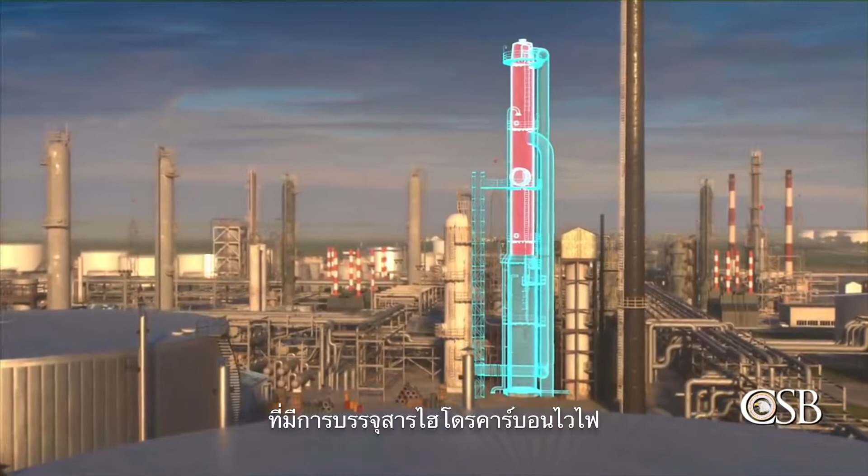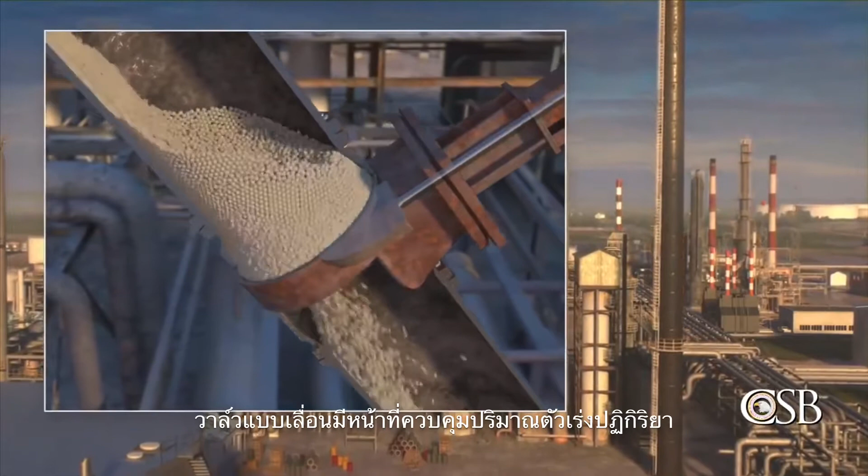Slide valves control the flow of catalyst between a reactor, which contains flammable hydrocarbons, and a regenerator, which contains air. It is important to prevent mixing the hydrocarbons and air, since if they mix, a dangerous explosion can occur. To avoid this hazard, the slide valves maintain a catalyst level between the reactor and regenerator, which acts as a barrier.

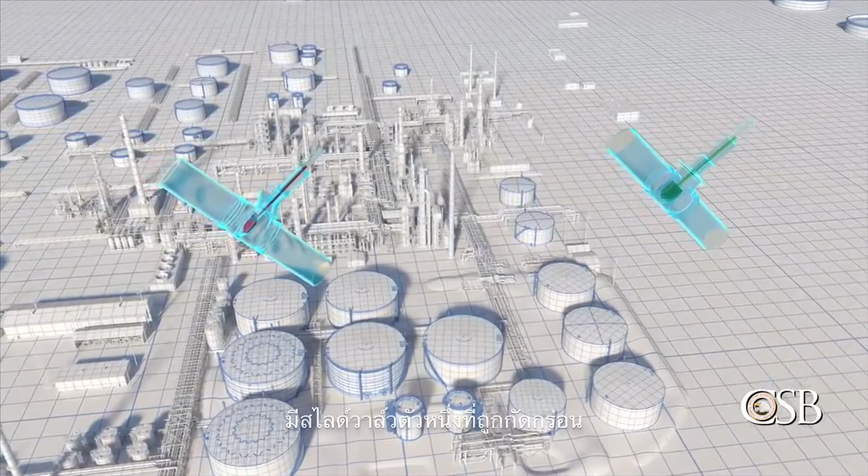To initiate the shutdown of the FCC unit, refinery workers stopped the flow of hydrocarbons to the unit and closed the two slide valves connecting the reactor to the regenerator. But unknown to the workers, one of those slide valves was eroded, and even though it closed, it could not maintain a catalyst barrier in the reactor.

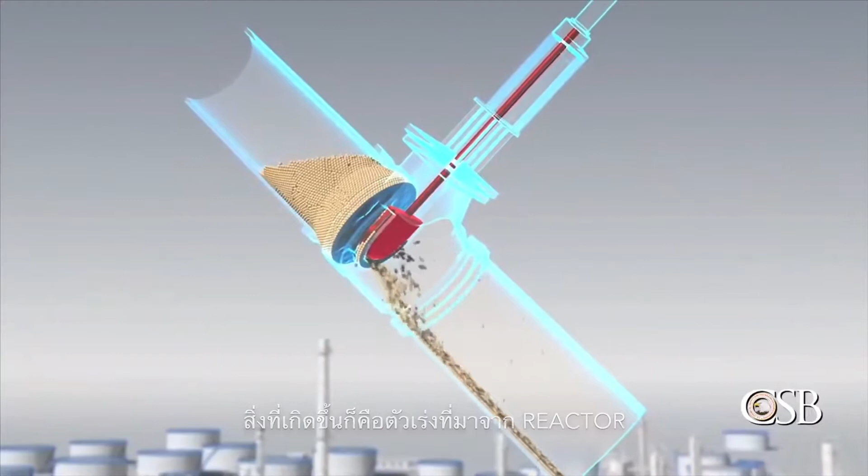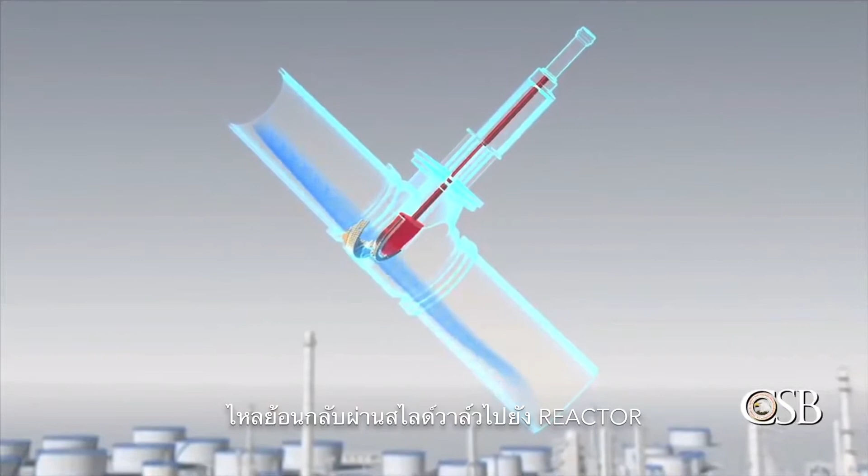As a result, the catalyst from the reactor fell through the valve to the regenerator, leaving no protective barrier between the two pieces of equipment. This allowed air from the regenerator to flow backwards through the slide valve into the reactor, and then into equipment downstream of the reactor, which contained hydrocarbons, forming a flammable mixture.

At approximately 10 a.m., the hazardous mixture of air and hydrocarbons found an ignition source, and there was a large explosion.

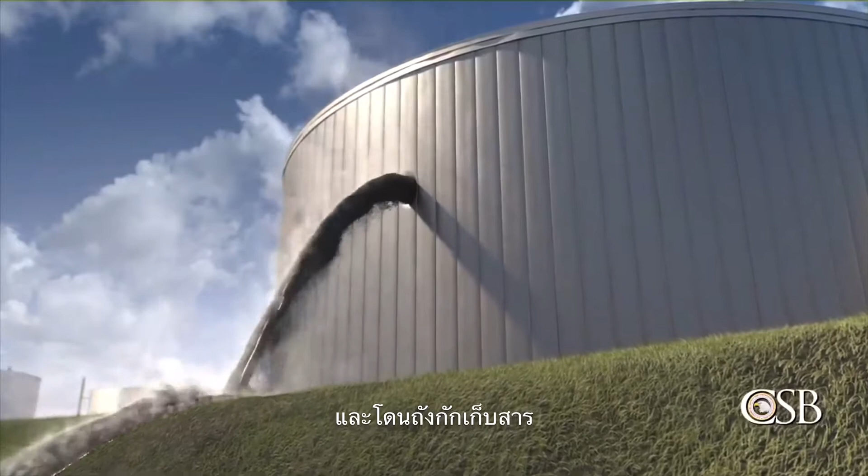Debris from the explosion flew about 200 feet and hit a large above-ground storage tank, puncturing the side of the tank and releasing hot asphalt. Asphalt poured out of the tank over the containment berm and into the refinery's operating units, where it spread along the ground.

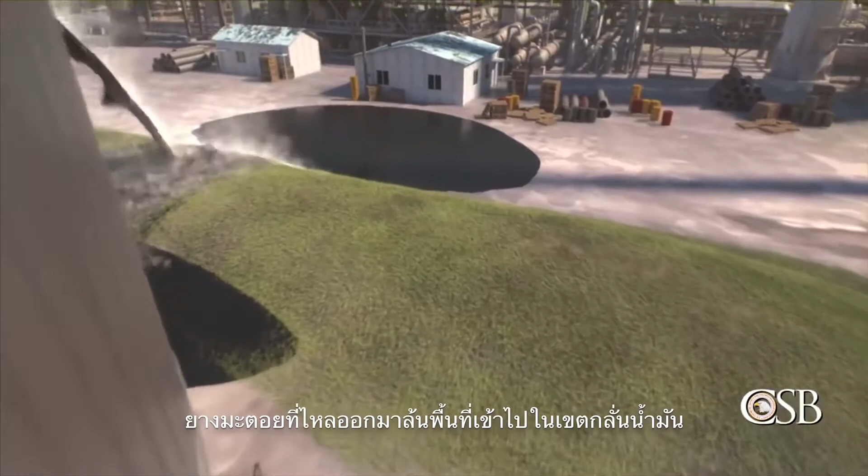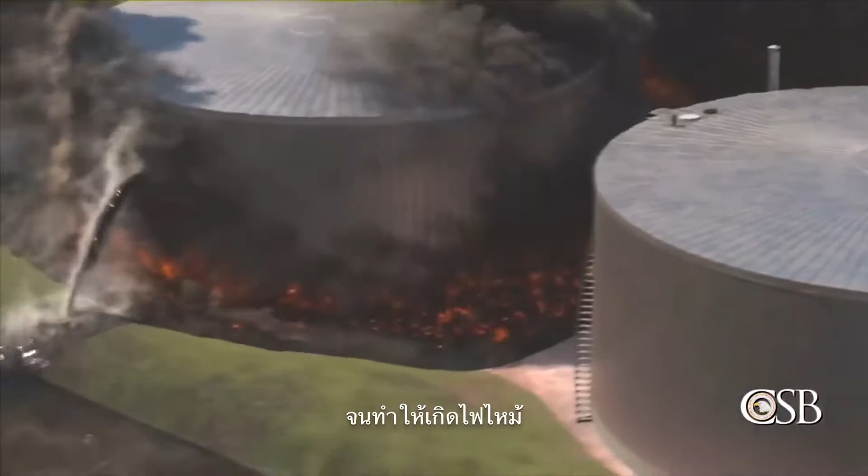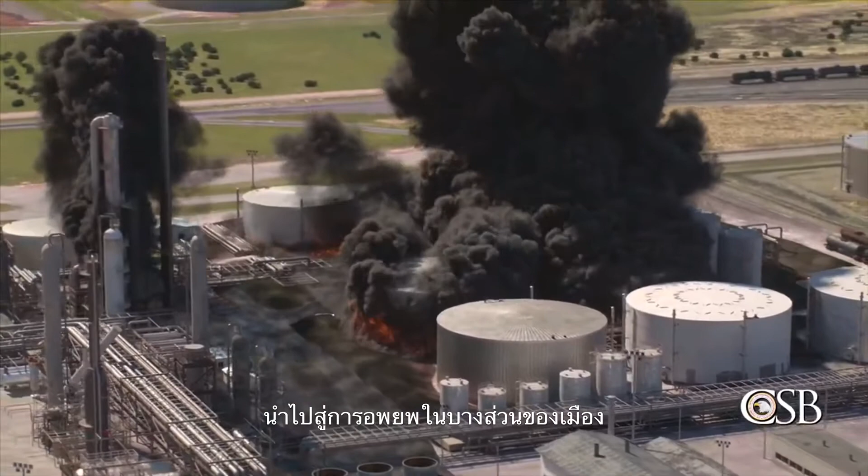At around 12:15 p.m., the released asphalt ignited near the storage tanks, and a fire broke out. The fire traveled along a stream of asphalt to the refinery's crude and FCC units. The fire produced a huge plume of black smoke, leading to the evacuation of a portion of the town of Superior. Typically, this type of asphalt fire can burn for days.

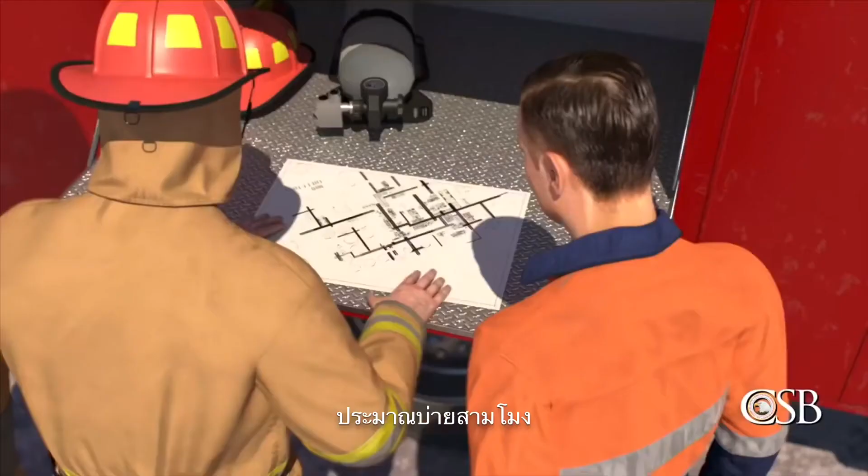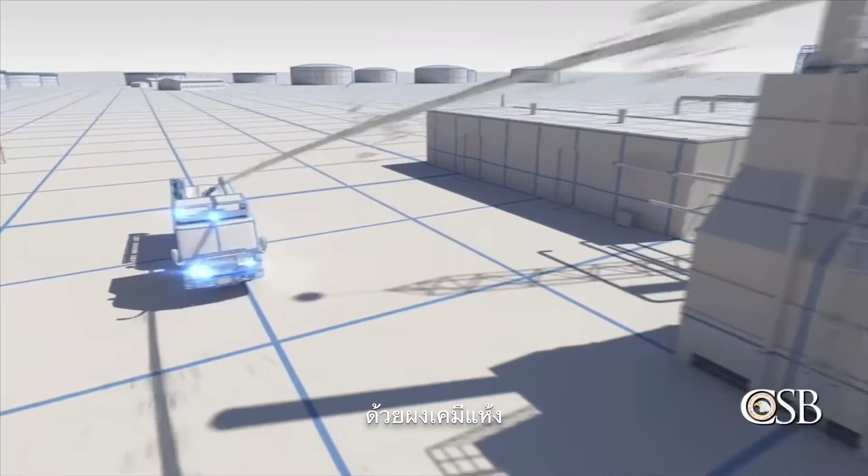A plan to extinguish the fire was developed by the refinery's emergency response team. Around 3 o'clock, they began to address the asphalt fire together with the Superior Fire Department. A fire truck drove to the edge of the crude unit, and emergency responders sprayed dry chemical fire extinguisher inside to fight the fires that had broken out there.

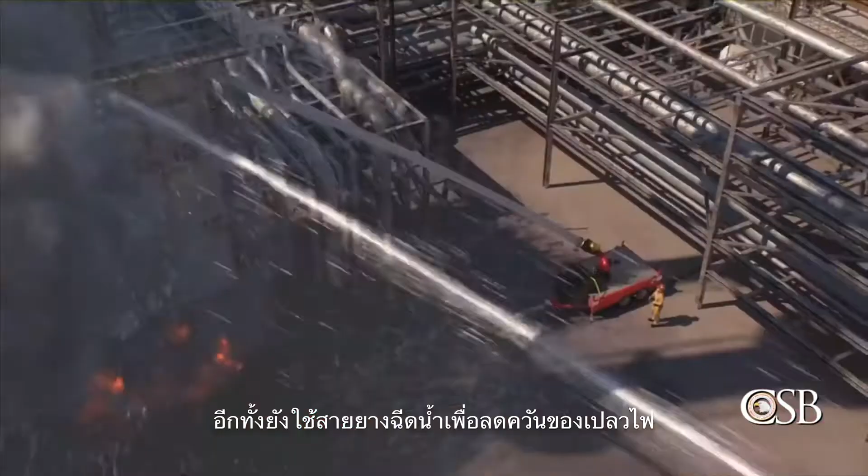Responders also used two stationary hoses called monitors to shoot water into the crude unit in an attempt to extinguish the flames. While these fires were being put out, over by the storage tanks, emergency responders began to approach the large area of burning asphalt.

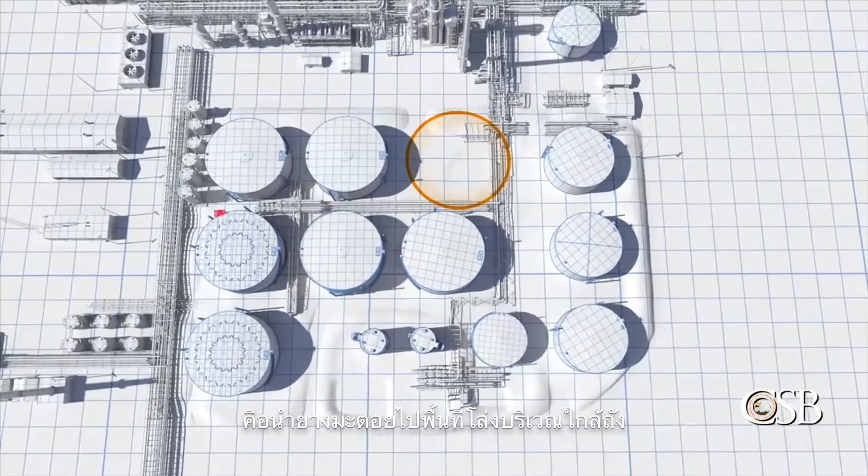The emergency responders' plan was to push the asphalt fire into an empty area near the storage tanks, and then aggressively attack the fire from multiple directions. First, they used two monitors, one to the north and another to the west, to sweep water to push the asphalt fire toward the designated containment area.

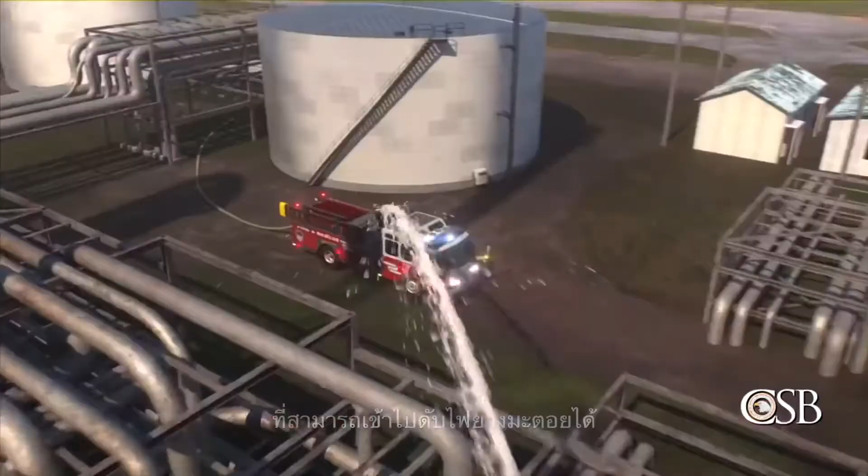Then, when the fires within the refinery's units had been extinguished, the fire truck relocated so that it could spray the burning asphalt in the containment area with foam from the east. Around 5:30, an additional team began to attack the fire from the south, spraying foam from a monitor. With the fire contained, emergency responders were able to put out the asphalt fire at around 7 p.m.